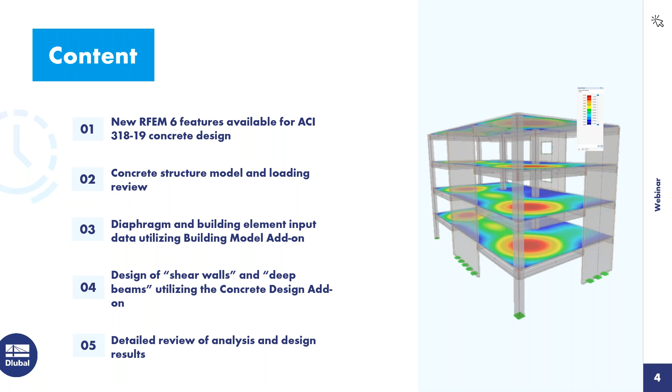For those not familiar with our program and the add-on concept, I want to quickly explain that for structural design related to concrete. RFEM 6 is the base program. This allows us to fully model the structure. We can integrate with BIM software. We have access to all the materials and cross sections in the library, and this is also valid for hybrid structures. We can load it and then get a full static analysis. If we want to take this a step further to design the columns, beams, or surfaces, we need the concrete design add-on that will carry out the design according to the ACI, CSA, or other international standards.

We then have the building model add-on. RFEM is a general FEA program, but this building model add-on releases building-specific features that give us the ability to define stories as well as shear walls and deep beams. There are many other add-ons relevant here, but for today I just want to mention a couple others used in our example for dynamic analysis. This includes the modal analysis add-on and the response spectrum analysis add-on to generate seismic forces. We won't be going into detail on these today, but we have previous recorded webinars for both ASCE 7 and NBC that go further in depth on this topic.

Turning now to the new ACI 318 features implemented since our last webinar: we now have the ability to carry out the punching shear design check for column-to-slab and wall-end-to-slab intersections. The current design check will only flag the user if two-way shear reinforcement is required. There is currently no input option for that two-way shear reinforcement, but we plan to add that in the near future. We've also added additional Chapter 18 seismic design checks. Currently this is reinforcement detailing checks only, but we'll continue to expand on this, such as strong column, weak beam.

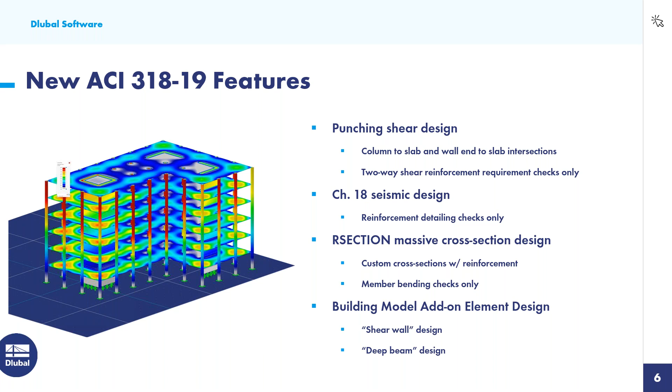Finally, we have the building model add-on that releases these building-specific features, and today we'll be focusing on shear wall design and deep beam design. On the next slide, let's talk a little bit more about the shear wall design we will see in today's example.

This does require the building model add-on integration in addition to the concrete design add-on. Essentially, we draw these shear walls with 2D surfaces within RFEM. When we define it as a shear wall, what's happening underneath the hood is that a result beam is going to be created, and a result beam simply sums up the internal forces across this 2D surface and presents it in a beam type manner.

We also can input the reinforcement under the shear wall dialog box. We have added this new cross ties input. Again, we'll see this in our example today.

As far as the design checks, we will refer to chapter 11 for the in-plane design checks, as well as out-of-plane, in particular section 11.5. We'll carry out additional chapter 11 detailing requirements such as spacing and minimum reinforcement. And as mentioned, we also have these chapter 18 seismic detailing requirements where we'll check the spacing and minimum reinforcement requirements here as well.

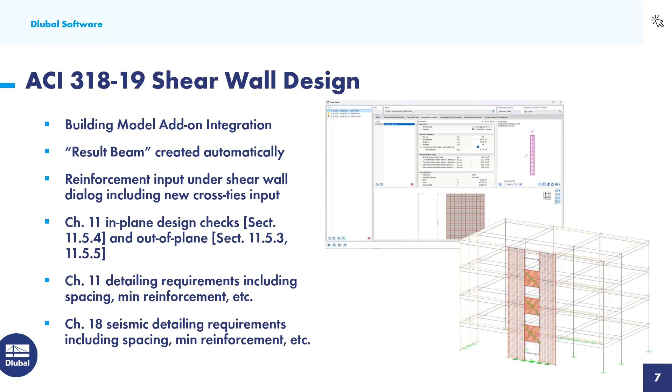Now, deep beam design follows a very similar workflow to the shear wall in the fact that we do need the building model add-on integration. Very similar, this is also defined as a 2D surface. We create this result beam underneath the hood, but instead of a vertical result beam like our shear wall, we have a horizontal result beam here to sum up all of the internal forces so that we can easily design this.

The reinforcement input options are also available under the deep beam dialog box, and we have added the new diagonal coupling reinforcement input. As far as the design checks, we will refer to chapter 9 for deep beam shear strength and detailing design checks, and we can also consider those chapter 18 seismic shear strength and detailing requirements for coupling beams.

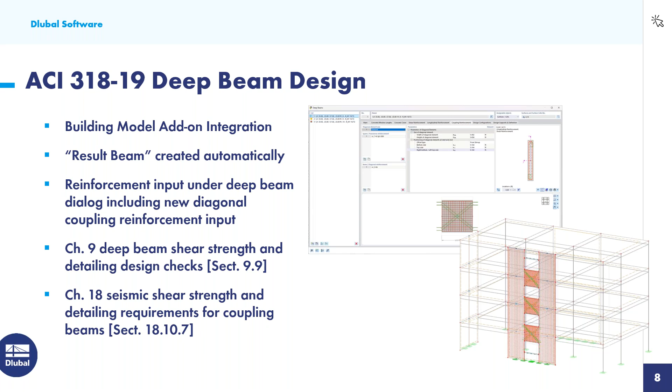So with that said, we will now turn to our example within RFEM. When we begin a new model, we are presented here with the base data dialog box. Under the second tab are all of the various add-ons that we have available, so essentially you're creating a custom software package that's specific for your design needs.

Now, for today's example, I do want to begin by enabling the concrete design add-on, and then we also talked a little bit about those dynamic analysis add-ons that we'll utilize in our example here.

Under the third tab for standards, we can generate the load combinations automatically according to ASCE 7. You'll notice here the latest 2022 standard is implemented. We'll also take advantage of our automatic wind load generators as well as snow load generators.

So we can set the standard here under the second option also to ASCE 7. The concrete design is set to ACI 318, the 2019 standard, but you can see here the alternative standards that we have offered, including the CSA. And finally, dynamic analysis for the response spectrum analysis will be carried out according to ASCE 7.

So now that we have this information set, you'll notice here that I have gone ahead and modeled our concrete structure for today. So let's do a quick overview. We'll begin with the materials. Everything is defined here with 5,000 PSI concrete that was just implemented, or pulled in from our material library.

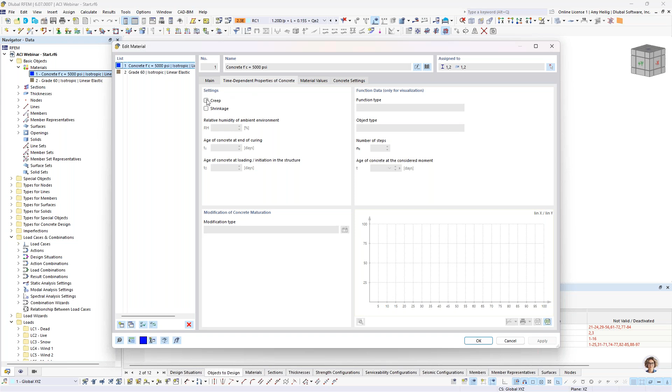Now, specific to concrete, we do have this second tab available to us under time-dependent properties of concrete, where we can further specify the creep and shrinkage behavior of this material. This will come into play a little bit later on for those time-dependent deflections. If we do specify creep and shrinkage, we will refer to ACI 435 for that consideration. For today, I'm not going to take advantage of anything related to the creep or shrinkage input.

So we will now move on to the cross sections. You'll notice here that the columns are defined as 20-inch by 20-inch square sections, and then we have various beams here that are supporting the slabs and spanning in between the columns.

Well, if I zoom in here and double click on one of these members, I want to point out that the member type is not set to beam. A beam is any standard column or beam element, but rather this is set to a rib. And when we specify this under this second tab, rib, we can actually define here the effective width on the left and right hand side of this beam element.

We further have the ability to integrate the internal forces and loads from the slab element itself from the static analysis, and then we can design it as a T-beam within the concrete design add-on.

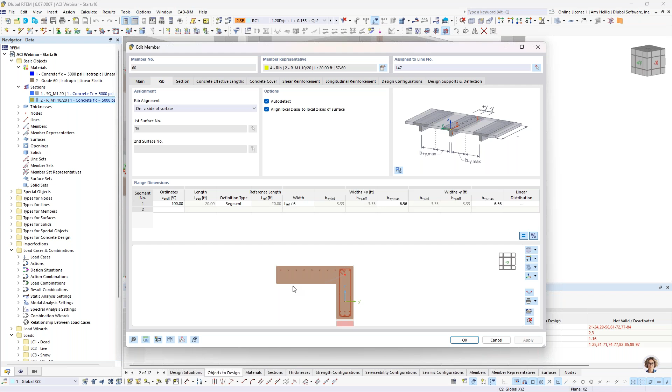For this rib element, we're at the edge of a slab, so we only have effective width defined on the left-hand side. This is unique to rib elements rather than a standard beam element.

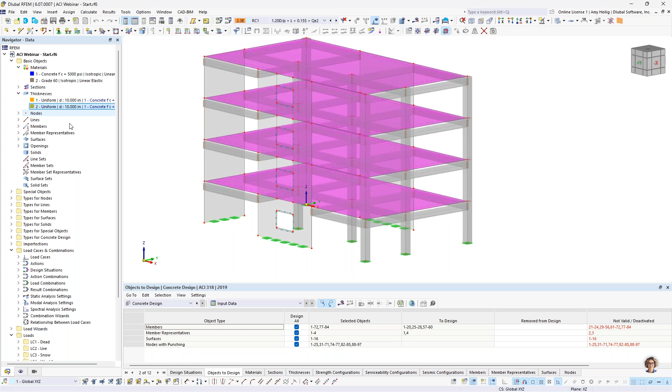We also have thicknesses defined here, assigned to the surfaces. For our shear walls, we have 10-inch thick concrete defined, and for our slab elements, these are also 10-inch, 5,000 PSI concrete. At the base of the structure, we have rigid nodal supports at the columns, and a fully rigid support at the base of our surfaces, defined as a line support.

We'll now move on to a loading overview. Going into the load cases and combinations dialog box, under load cases I have defined dead, live, snow, and wind. These are our static load cases, and once defined here, we would need to apply the loads graphically to the structure.

We'll take a look within our drop down at the dead load case. Self-weight is automatically considered internally for all elements, but I have added an additional surface load here of 50 pounds per square foot.

We are not confined to applying a surface load to the entire surface, as shown here in our toolbar. We also have options called free loads. For example, a new free rectangular load could be applied to just a certain portion of the surface rather than the entire surface as a whole.

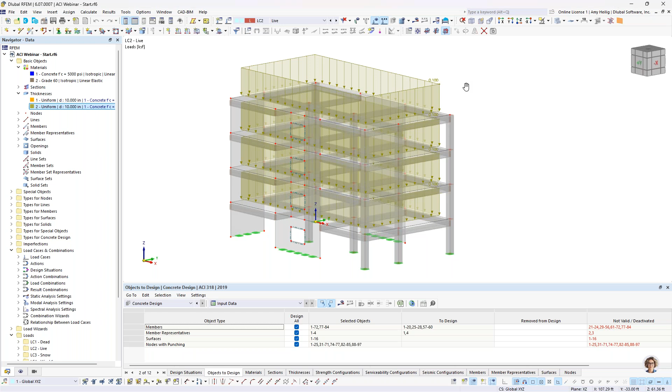We also have the live load case here, same concept. The magnitude for the surface load was increased to 100 pounds per square foot.

Then we have our snow load here at our roof level, and for this I took advantage of the load wizards found in our dialog box. Under the load wizards, we set this to ASCE 7 so the program can automatically generate the snow and wind loads. In this dialog box, we specify the geometry and input the parameters specific to ASCE 7, and the program calculates these snow loads for us.

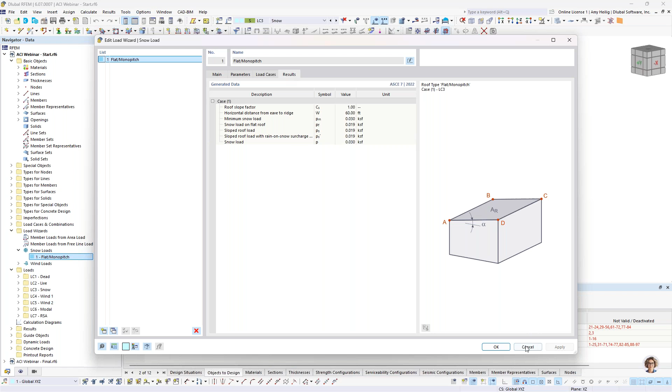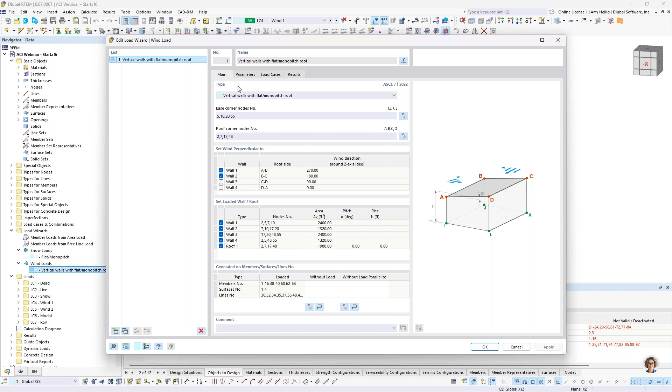Very similar, we have our wind load generator. If I toggle to my wind load case, we see this applied lateral load. Going into the wind load dialog box, again we input the geometry points and the type of roof, then input the parameters specific to ASCE 7, and the program can generate all of the wind load cases from case 1 to case 4 of ASCE 7.

For this simple example, I am just generating the minimum wind loads in both directions, so everything else is unchecked. For our first minimum wind load, we see this applied area load laterally in the global Y direction. I can right click to display separately, which shows the loads applied to the structure based on the tributary areas, or turn this off for a cleaner area load display. Similarly, we have wind load in the other direction with its applied area load.

Going back to our load cases and combinations, I also have a couple of dynamic load cases here. This is covered in previous webinars on our website and YouTube channel, but we have a modal analysis load case where we carry out the eigenvalue analysis to determine the natural frequencies, vibrations, and mode shapes of the structure. We can import a mass combination for this calculation.

We also have our response spectrum analysis load case. We refer to ASCE 7 to generate these seismic loads in the orthogonal X and Y directions. Ultimately, once we have all of these load cases set, we need to combine them into the load combinations.

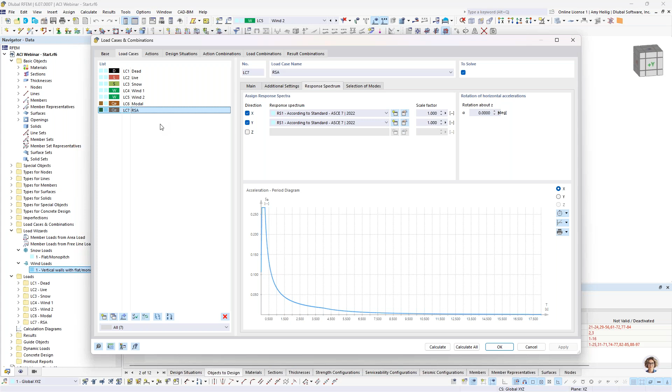Under the design situations here, you can see that the program automatically groups together these load combinations in what we call a design situation. So we have our first two design situations here in orange that include our factored load combinations from ASCE 7, cases 1 through 5.

This second factored design situation includes all of our seismic loads, 6 and 7, again directly from ASCE 7. We can click on this info button to see that information pulled directly from the standard.

Now we further have a couple design situations here for our unfactored loads. So we have the ASD load combinations 1 through 7, and then 8 through 10 that include those seismic forces. These design situations are ultimately needed within the concrete design add-on, and we'll see later exactly how we assign the limit states to these different design situations.

But for now, just think of these design situations as grouping together the load combinations. If we're interested, we can click on the load combinations tab and see the load combinations listed out individually - our factored load combinations in orange belonging to that first design situation, and our unfactored load combinations here belonging to the third design situation.

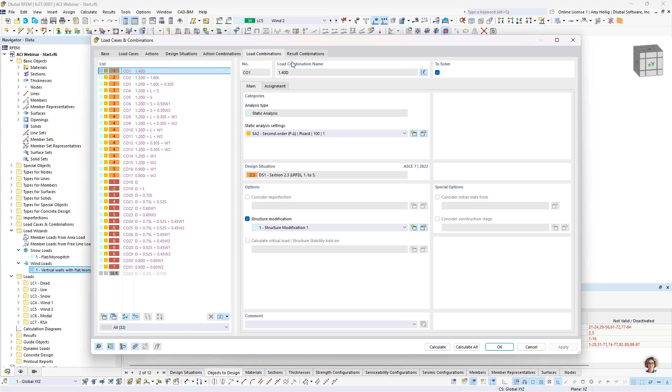This is different than a load combination that is automatically carried out according to a second order analysis considering P-delta effects. Again, this is covered in that response spectrum analysis webinar, but ultimately these result combinations also belong to those design situations.

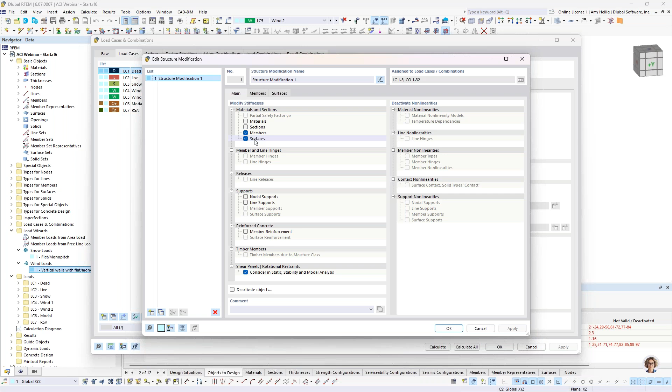One more thing I want to touch on is that for the load cases, I have a structure modification set here, and this is really important for concrete design. If we go in and take a look at this definition, I have enabled both members and surfaces because these are the two elements we have in our model today, and then I get two additional tabs up at the top.

Within my first definition type for members, we have the ability to directly select ACI 318, which refers to table 6.6.3.1.1A to apply those I-crack factors to our member elements within the model. We would want to select whether this is a column or a beam, and we can see the relevant stiffness modification factors given here.

So once we have this definition, we can graphically select all of the column elements within the model that this stiffness reduction should be applied to, and the same exact concept for our beam elements.

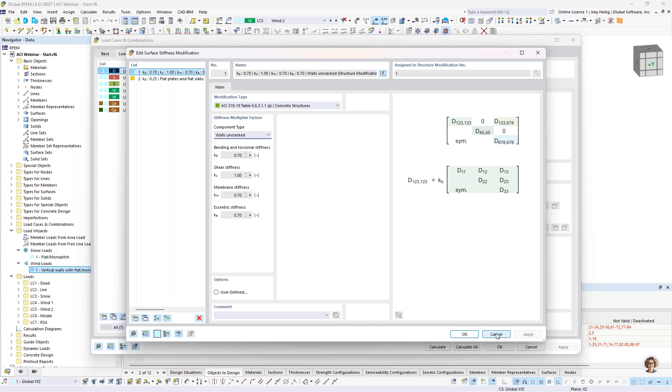In a very similar manner, we also have the surfaces tab here - I created my first definition by simply selecting ACI from this dropdown, then choosing whether it's walls uncracked, walls cracked, flat plates, or flat slabs. This refers directly to the ACI for those I-crack factors, and then we can graphically select the surfaces that this stiffness reduction should apply to.

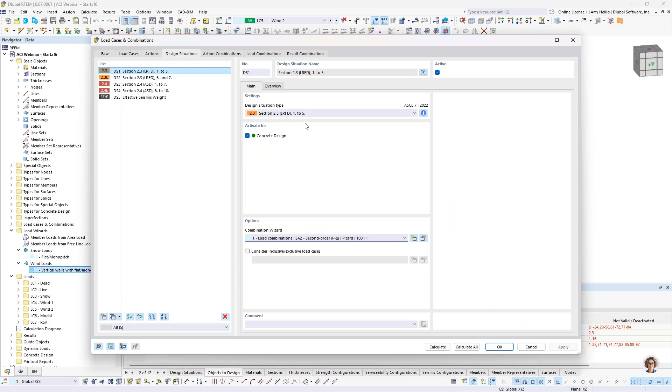So we could go ahead and apply this to all of our load cases. It's also possible under our design situations, especially these factored design situations, to go into the combination wizard options and activate this structure modification as well. By doing it within the design situation, you'll see the load combinations automatically include those I-crack factor stiffness reductions as well.

So now that we have covered the loading and the structure, it's now time to input the reinforcement that's specific to the concrete design add-on we have already enabled within the base data dialog box. Before we begin, you'll notice we do have the concrete design option available within our dropdown table.

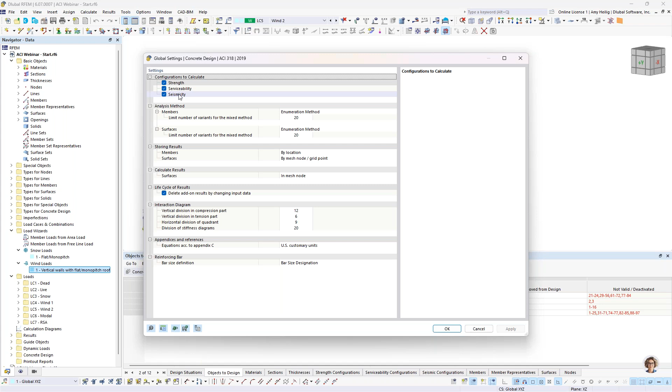When we select this, there is an option called global settings. By default, the strength and serviceability design checks will always be carried out. But if we want to further carry out those seismic detailing checks, we would want to turn this on, because by default this is typically not enabled. So we'll go ahead and do that for today.

Okay, so we want to talk about the reinforcement input for a column. And if I double click on this column here, you'll notice that the design property checkbox is turned on. So this is telling the program that not only are we interested in carrying out the static analysis within the base program, but I also want to utilize that concrete design add-on to input in the reinforcement. Now, when I turn this off, you'll notice all of these tabs here disappear, and this is simply telling the program that we're only interested in the analysis.

So we certainly could carry out the reinforcement input here within this single column, but I do want to talk about the benefit of what we call member representatives. Currently I have this turned off graphically within the model, so I'll go ahead and turn that on. You'll notice that we have a lot of color-coded dots here for each one of these members. Well, this is because the program has grouped together identical members in what we call member representatives. So members that have identical cross sections, materials, lengths, and possibly even for concrete, the same reinforcement input will all be grouped together here.

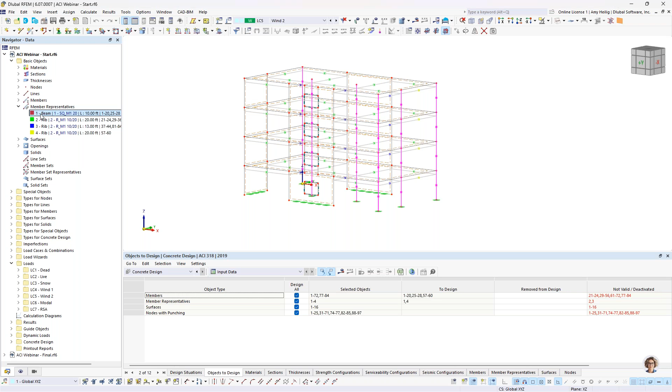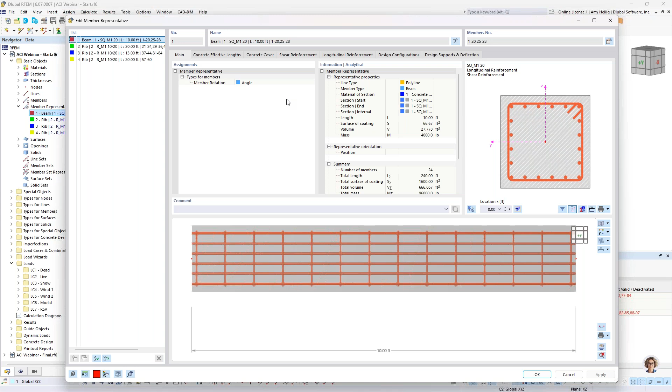Now, the benefit is that if I take a look at the member representative number 1 here, you'll notice that this has grouped together all of my columns. So we see this highlighted in the background. I have these exact same tabs here to input in the reinforcement as I do the individual columns. The benefit is that if I define the reinforcement here within the member representative, it's applied to all columns at once. If I need to make a change, I do it within the member representative. Again, it's going to affect all the columns defined here. So we will go ahead and input in these various tabs, and I'll go through these in detail.

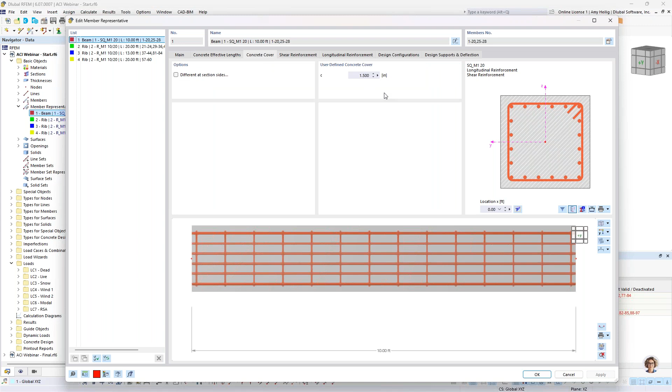The concrete effective length. So if we are carrying out a first order analysis and utilizing the moment magnification method, we would want to input in an effective length. However, if we are designing to second order analysis and considering P-delta effects, which we are within our load combinations today, we don't really need to do anything within this particular tab. So we'll go ahead and design according to second order analysis. Now the concrete cover should be input. This is left here at 1.5 inches, which is the default.

Now I went ahead and input in the shear and longitudinal reinforcement for these members, so we'll just give a quick overview. So the shear reinforcement is set at number 4s at 9-inch spacing on center. So we can see that spaced out evenly along the member here. Now it's entirely possible to create different zones for both our shear and our longitudinal reinforcement with this option in the lower left-hand corner. And then we can modify here the span location. So for example, if we wanted closer spaced shear ties at the ends of the member versus the center, we could create a couple different zones here.

The longitudinal reinforcement, you'll notice here that I have selected the option from our drop-down as uniformly surrounding for the longitudinal bars. And I have defined 20 number 6 bars, so the program will place these around the cross-section as shown. Now, we do have additional options here to define a development length if we would like. You can see that within the drop-down box here, where we can see the development length shown graphically. We can modify that development length itself in terms of feet. For today's example, I'll leave all of the development lengths off, but that is where you would want to input that information.

Now, the design configurations, I'm only going to go through this tab once because it's the exact same application for all elements that we are designing. We have here these strength configurations to begin. So if I go into the default setting here, you'll notice that we have 4 different tabs depending on which element we're designing, whether it's a member or surface or even punching shear. These are all of the various options specific to the strength design checks according to ACI. So whether we're turning options on or off or modifying them, this is all specific to the strength design. Now we did put in here the code references, so we're trying to clarify exactly which settings you are modifying. You can refer directly to the ACI standard.

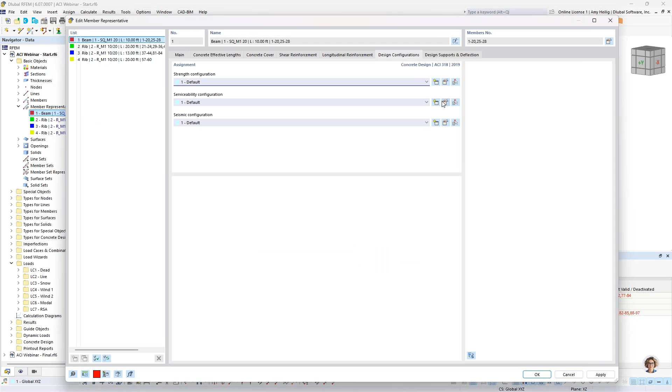Again, this is going to be specific to the serviceability design check. So for example, we can calculate the crack width. For surfaces, we have minimum reinforcement due to shrinkage and temperature. We also can check deflections. So whether that is simply supported or cantilever beams or columns, this also can be carried out for surfaces.

And then if you remember, we talked a little bit about the time-dependent deflection. So I had mentioned that under the material properties, when we input creep and shrinkage for that material in more detail, we probably want to toggle this to refer to the ACI 435. So this is certainly a far more complex approach here within the serviceability design checks for that long-term deflection.

Now, alternatively, when we leave this as default with the factor according to the ACI table 24.2.4.1.3, we're simply going to apply some type of factor to the immediate deflection based on the duration of the load. So much more simplified approach.

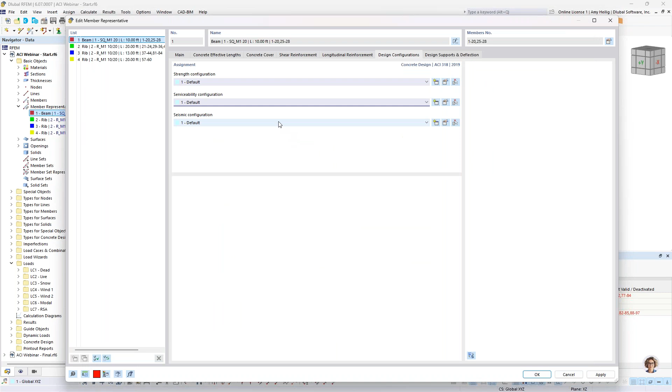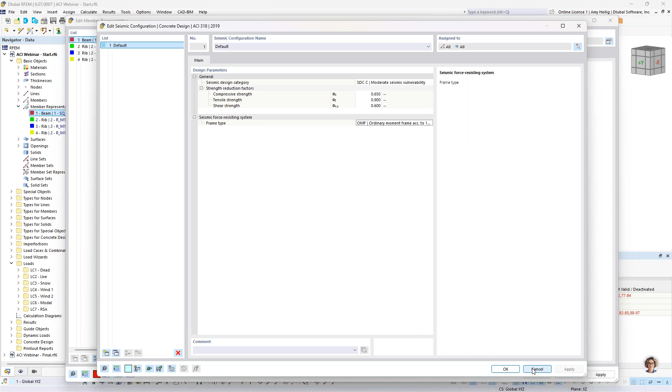Okay, and finally we have the seismic configuration. So we'll go in here and you'll notice that for the seismic detailing checks, we can select for our members the seismic design category from this dropdown. We also have the frame type here that is set to ordinary, intermediate, or special moment frame. And again, this is applicable to members and to surfaces for those additional detailing design checks.

And finally, we have the design supports and deflection. So if I input nothing within this tab, the program is simply going to assume that this member is supported at both ends, and it will refer to the limiting deflection ratio for simply supported members. In contrast, if we have a cantilever, we probably want to assign a design support at the left or right end so that the relevant deflection limit is referred to.

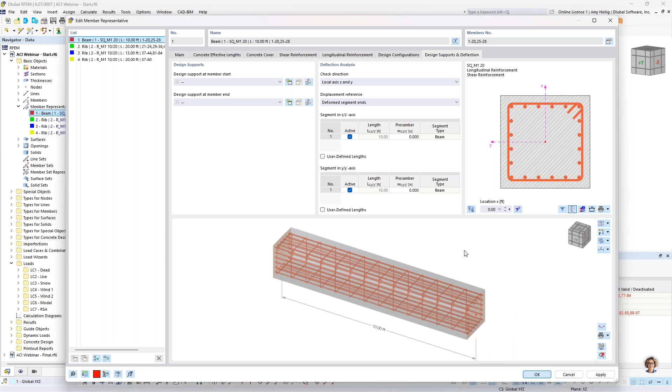Now, I am just going to leave this as simply supported for our column elements, but we'll see in just a minute how we can set this differently for our rib members. So once this information is done, we want to move on to the reinforcement input for our 4 rib members over here on the right-hand side. So very similar to the columns, these are all grouped together in a member representative as well.

So if we take a look just to quickly review this information, again, because it's a rib member, we are going to include the effective width here of the slab for the member design. And we run through these various tabs. Concrete cover is set to 1.5. The shear reinforcement is number 4, set at 6 inches. Again, we could set different zones if we would like.

The longitudinal reinforcement. So this is going to be a little bit more detailed than what we saw with the columns. You'll notice that I have 3 number 6s set to symmetrical. So this is going to place, again, 3 number 6s at the top and at the bottom that are currently highlighted. Well, we also have an additional 3 number 6 bars defined here at the bottom with what we call the rebar type line. So this line option allows me to place a line of reinforcement, and I can specify the different offset either left or right or top or bottom with this input option.

And finally, we have 8 number 6s that are defined in that surface effective width itself. So this was also defined with the line option. I modified the offset here, such as 8 inches, so that we can input this longitudinal reinforcement within the slab element. So pretty simplified for today because we'd probably want to create different zones with different longitudinal reinforcement, but this is just a little bit of an overview for this simple example.

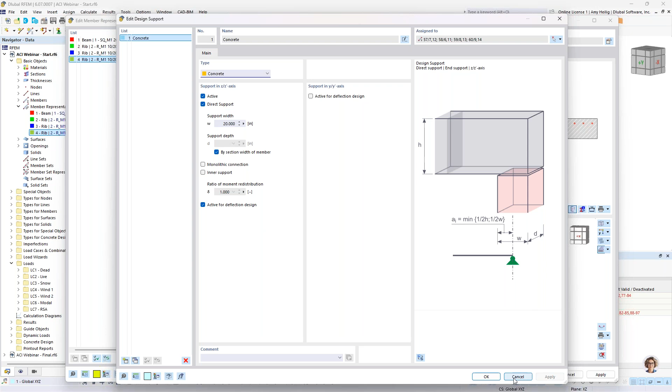So once we create that support, we can select that same definition type here at the member end, and then we actually see the support shown graphically here in this dialog box. So this is how we can consider that reduction of the shear force.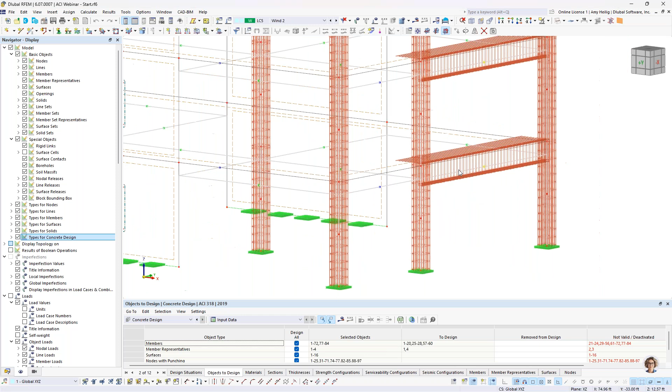Okay, so now that this information is input for our beams and columns, what would typically be shown if I go to my second tab here under the navigator and I turn this into wireframe view, is we can actually view the reinforcement that we have input graphically in the global 3D model. So again, this is only specific to the elements here that I have defined so far. If you feel like that's a little overwhelming, you can always turn that off, of course.

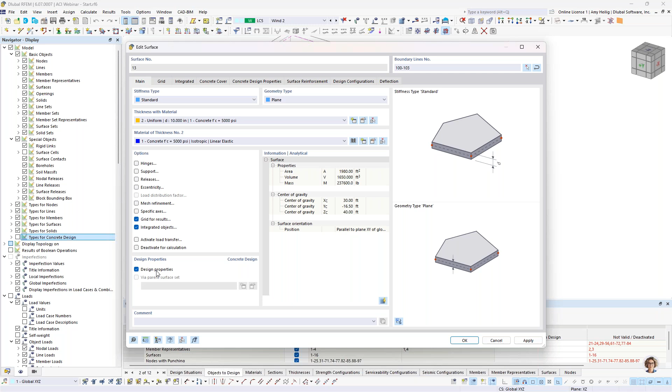Now, to talk about the surface reinforcement, I'm not going to go through this. This was covered in a previous webinar, but it's the exact same concept where we can activate the design properties, we can input the surface reinforcement, and similarly for punching shear checks, what we would want to do is to choose one of these nodes where it's framing into that reinforced slab.

We double click on it, and very similarly, we have a checkbox here for punching design and an additional tab here that refers to the strength configurations for those punching design checks. So again, we won't be doing either one of those for today's example, but I just did want to mention that. So now it is time to move on to the building model add-on.

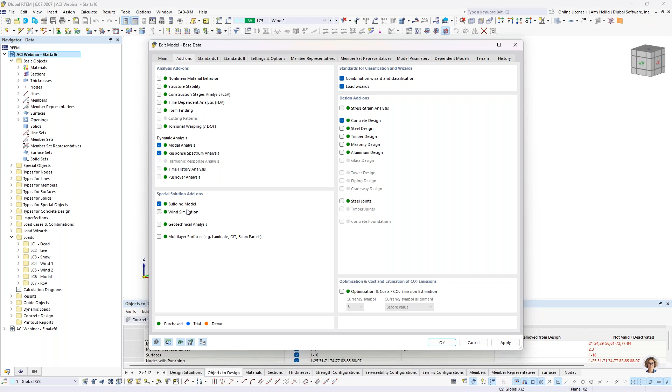So for this, I want to right-click here to activate the base data dialog box, and under the add-ons, we will go ahead and turn on the building model add-on. And I click OK. So at first glance, nothing changes graphically here. The only thing that we now have access to in our navigator over on the left is a new folder called the building model. So we can now define our building stories in this general FEA program.

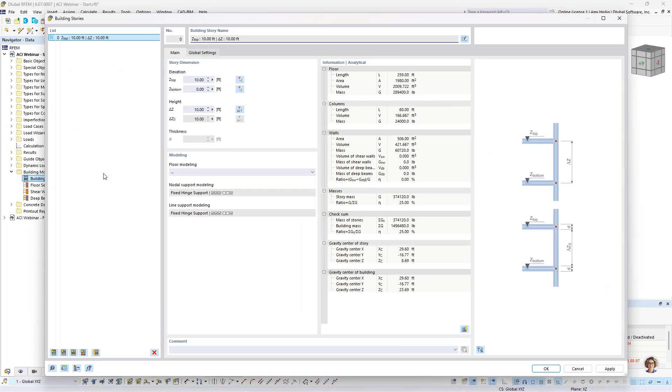So I'll go ahead and double click on this dialog box. And the program will automatically assume that we want to create our first story, and it detects the height of that first level. Well, we will continue to create the additional stories above it with the option here in the lower left-hand corner for a total of 4 different floors.

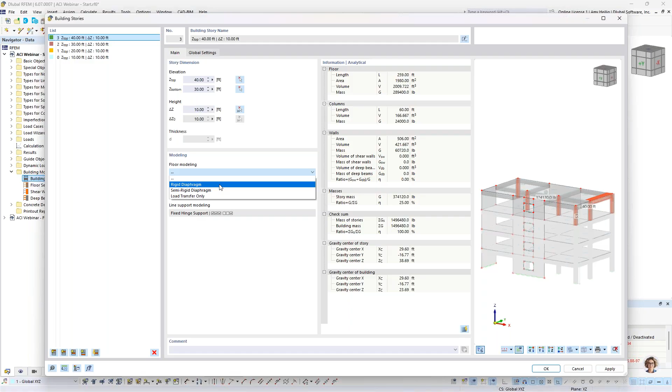Now, once we have created the different stories, you'll see here that for each one of our floors, we now have the ability to assign a diaphragm to this particular floor or to all of the floors, including rigid, semi-rigid, and load transfer only. So let us go back to the PowerPoint because I do want to discuss the building model add-on concept in more detail, as well as these different diaphragm options.

So as mentioned, RFEM 6 is a general FEA program. We are not restricted to only building analysis and design. Rather, we can model tanks, silos, fabric tensile structures, maybe an FEA of a steel connection. Really anything is possible. But this building model add-on is releasing these building-specific features in this general FEA program, such as the ability to define stories. Now, we also have the option, which we'll see in just a minute, to define shear walls and deep beams.

The added benefit of the building model add-on is that once we run the static analysis and even the dynamic analysis, we will get additional results available in table format for results by stories. So for example, if we're looking at a response spectrum analysis, we can actually view the story shear or the base shear in table format. For static or dynamic analysis, we can also view the shear wall forces in table format. We can export that out to Microsoft Excel quickly.

If we have a rigid diaphragm, we'll be able to view in the table the center of rigidity as well as graphically where that center of rigidity occurs. So many more options, again, specific to buildings will be released. Now, as mentioned, we have now these various diaphragm types available. So we recently released semi-rigid diaphragms. So now we have all 3 options available to you, including rigid, semi-rigid, and what we call load transfer only, otherwise known as a flexible diaphragm.

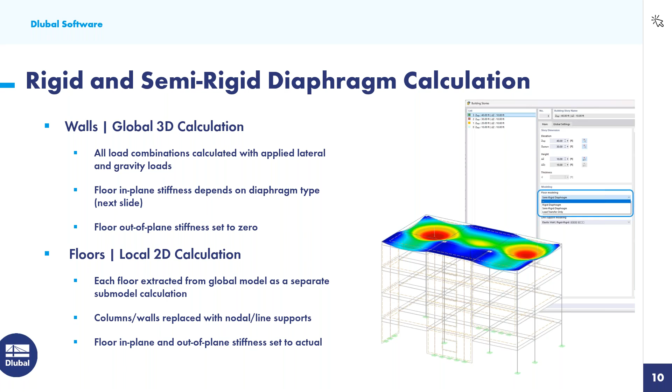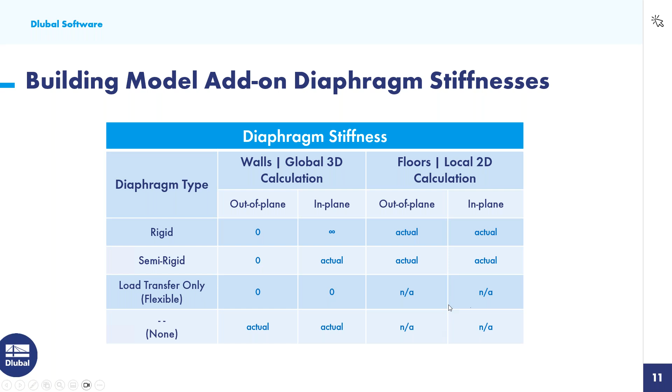Now, we also have the couple columns here at the end for the local 2D calculation. So in case we have defined a rigid or semi-rigid diaphragm, you can see here that the actual stiffness will always be used for both out-of-plane and in-plane. Now for the load transfer or no diaphragm, remember we're not running a separate 2D calculation, so this is not applicable within this table.

So we'll go back to our example today, and for all 4 of my floors, I'm going to define here a semi-rigid diaphragm. Now remember, for rigid or semi-rigid diaphragms, when we carry out that separate 2D calculation, we're replacing the walls and the columns underneath it with line and nodal supports.

Rather than having those line and nodal supports set to fully fixed or fully released, the program can actually calculate the true stiffness of those elements framing up underneath it, and we can create an elastic support condition here with a spring stiffness set. So that's what I'm going to use today. I want the program to refer to the true stiffness of those elements framing up underneath it.

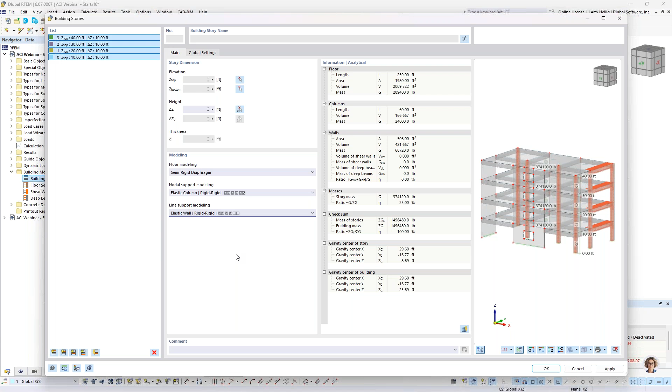Once we have set this information, you'll notice that if I double click on one of my floor elements, the stiffness type is now set to floor slab semi-rigid diaphragm. I can't modify this because it's defined directly within the building model add-on.

Now, in addition to the building stories that have been defined, we have the ability to create our first shear wall definitions. Before we do, I'm going to activate what we call the surface cells, which I had turned off graphically, and I'll turn those back on. Surface cells are automatically turned on when we enable the building model add-on.

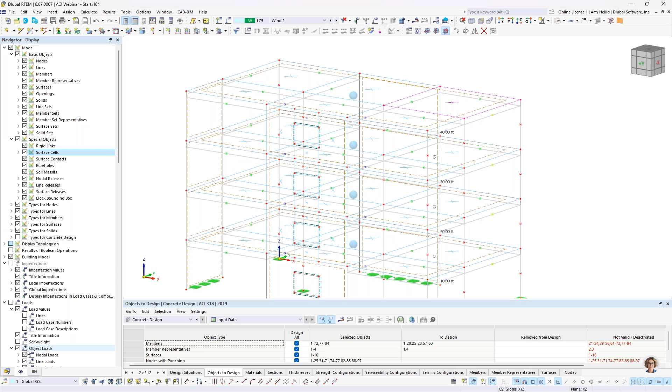You can see here that it creates these surface cells at various portions of the structure on the surface elements themselves. I'll turn this into an elevation view and highlight only my front shear wall. Here we have our 4 shear walls displayed graphically, and you'll notice that those surface cells for the shear walls at the 2nd, 3rd, and 4th level are shown. This is really helpful because it will help us define what is a shear wall on the left and right hand side versus what's a deep beam spanning between these openings.

Now, for this first shear wall, you'll notice that I don't have those surface cells. So anytime you have a shear wall with an opening, what we need to do to generate these surface cells is actually create a line element that spans from the opening to the edge of the surface. We certainly can do this manually with the new line option in our toolbar and graphically drawing that line, but I'd like to show you a quick trick.

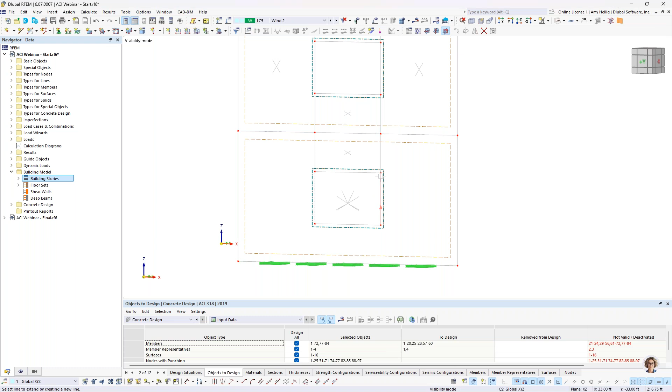With our drawing tools down at the bottom, we have this option to extend the line graphically, something you might find similar in AutoCAD. When I choose this option and hold down the Alt key on my keyboard, the program will automatically extend this line when I click on it, on the upper left and right hand sides, without affecting the opening. I'm going to do so here at the bottom right and at the bottom left. Now you can see those line elements are automatically created again without affecting that opening, and the surface cells were automatically detected when we do this. So in case you have a shear wall with openings, you certainly want to take this workflow.

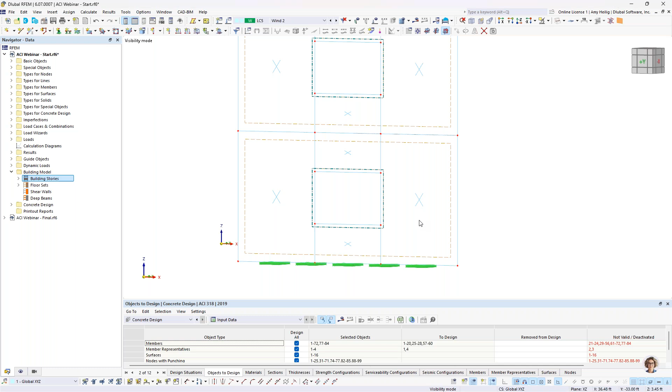So now we can define our first shear wall by right-clicking within our building model folder, and we create our first shear wall definition. We want to select the surfaces, or the surface cells. So I will graphically select all of my surface cells on the left-hand side of this opening to define one continuous shear wall on the left-hand side.

Once this is done, I'm going to create a new definition type, doing the same thing on the right-hand side of the openings. And we have one more shear wall definition. For this one, I'm going to cancel out the visibility and go back to a rendered view because I want to create my third shear wall over here on the left-hand side. Notice this one doesn't have any openings, so we can just directly select the surface itself without having to worry about the surface cells.

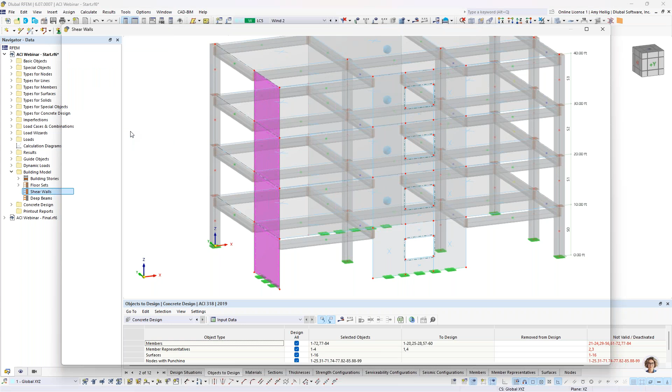Once we have input the shear wall definitions, we can hold down our shift key to select all of them, because I'm going to input the same options here for all 3 shear walls at once. Now, the first option here is to generate the results section.

Remember, I talked about how that result beam is created underneath the hood. Then we can present the internal forces that are summed up over these surfaces in table format. So that's what we're enabling here for the static and dynamic analysis, just to present that in table format. Now, very similar to our columns and rib elements, we want to turn on the design properties because we'd like to design these in the concrete design add-on.

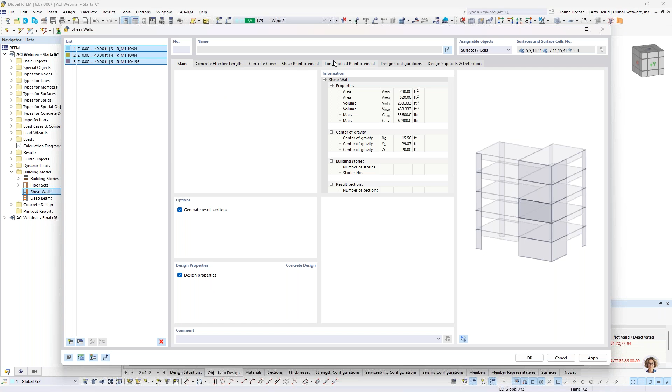And then we have the additional tabs up here at the top. So the concrete cover is going to be set at 1 inch for our shear walls.

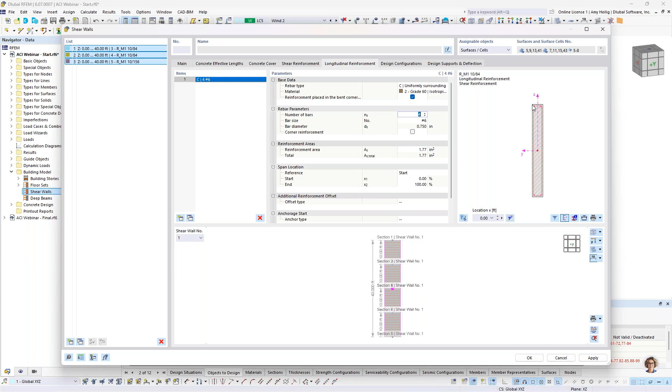I'm going to jump to the longitudinal reinforcement first, and select the option uniformly surrounding. With this option, I want to place the reinforcement at the bent corners of my stirrup, and then set the number of bars to 22 number 7s, selecting number 7 bars from the drop-down box. So then the program just places these longitudinal bars all the way around the shear wall.

We're looking at it in a plan view here. Now, the only modification I want to make is to shear wall number 3. This has a much longer width than the first couple shear walls, so we'll increase the longitudinal reinforcement to 40 number 7s, and we see that adjust graphically.

So now going back to the input for all 3 shear walls, we'll go back to the shear reinforcement. I am going to select number 5s from my dropdown, and adjust the spacing to every 5 inches, so 0.417 feet.

This is a new option we have added within the shear walls: the ability to generate what we call the cross ties when I activate this checkbox. So now we see those cross ties enabled across all of the longitudinal bars here.

Now, if you do not want to consider a cross tie at any one of these locations, you can just click on the longitudinal bar here in the preview, and that cross tie will be deleted. If you want to add it back in, you just click on the longitudinal bar again, and you'll see that cross tie considered.

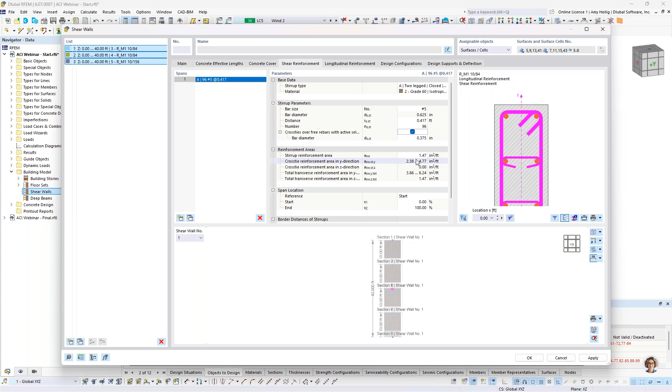Now, lastly, we have the design support. Very similar to what we saw with our member elements, we can also add design supports where it's framing into the slabs or floors along the height of our shear wall.

For the start and end of the shear wall, I'm going to create a new design support of the type concrete. The support width is set to 10 inches because that's how thick my slab is that's framing in the transverse direction. For this one, it will not be an inner support.

I click OK, and then I can select this new definition within my dropdown, and we can zoom in here and see that design support shown graphically at the start and end of the shear wall.

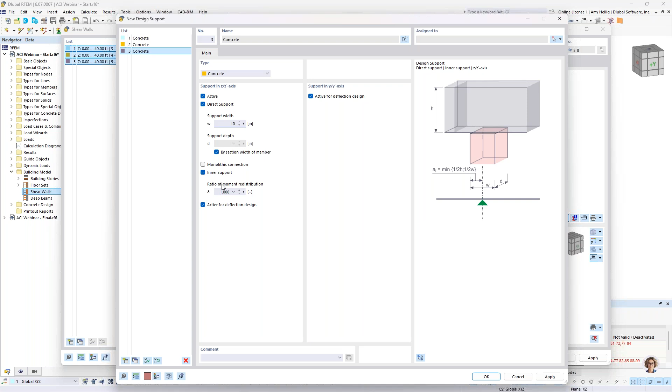Now for my interior support, we can create a new definition type. Again, very similar, 10 inches in width, but this time it will be an inner support. We can select this from our drop-down box for all of the interior support options.

Now you can also hit F7 on your keyboard to copy the cell from above into the current cell. We now see those support conditions modeled along the height of the shear wall, representing those slabs framing in at those transverse locations.

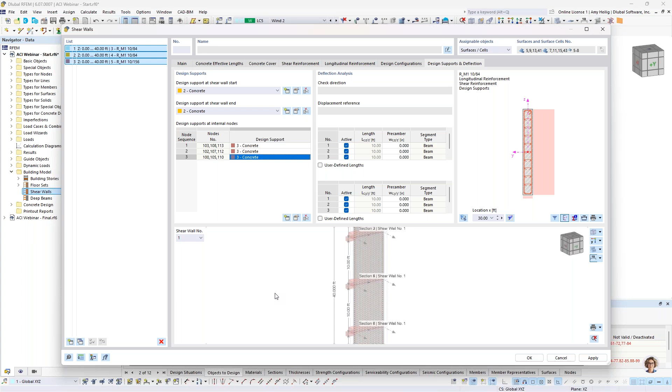All right, so now that we are done with our shear wall input, let us talk about deep beams. This is really going to be a very similar workflow. We're going to begin by right-clicking to create a new deep beam.

The program will ask us which surfaces or surface cells we want to consider. I'm going to zoom in here and choose the 2 surface cells that are spanning between the openings of my first and second floor.

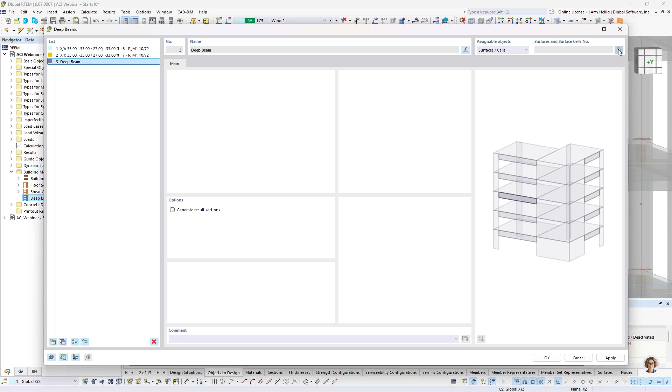I'm going to create my second deep beam that will span between the openings of the second and third floor. And finally, we are going to create our third deep beam that spans between those upper floor openings.

I'm going to highlight all three of these to generate the results sections and also to turn on the design properties with the coupling reinforcement that is specific to deep beam input.

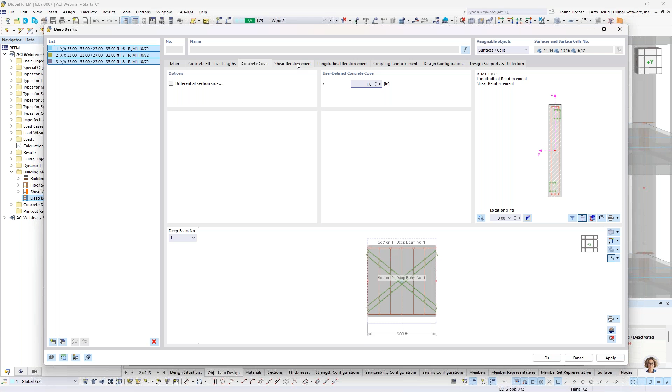The concrete cover, I'll modify this to 1 inch. And then we have the shear reinforcement, so I'm going to specify number 5, similar to our shear walls, at 0.417 foot spacing.

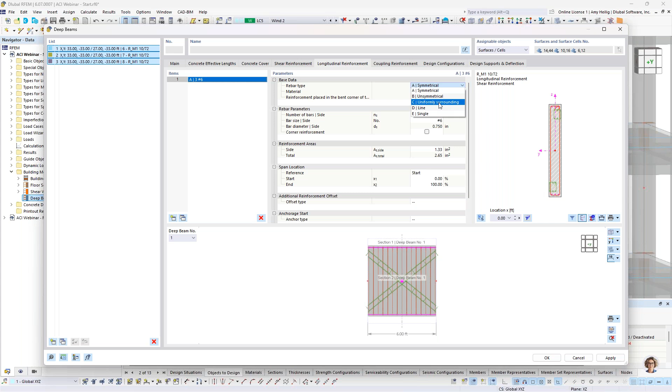We further have our longitudinal reinforcement. For this one, I am going to select from my dropdown, uniformly surrounding, and we're going to place those rebar at the bent corners of the stirrup with this checkbox.

I'm going to select 30 number 6 bars, and the program will go ahead and place those evenly around the perimeter of this deep beam.

And finally, we have the coupling reinforcement. Again, this is new, specific to the deep beam design. The first input is the transverse reinforcement, and as I click on it, it's highlighted here to bundle these diagonal bars together. The default is number 3 at 1 foot on spacing, and we'll leave this as default.

Then we also have the diagonal reinforcement itself that we can view here, or zoom into the cross-section view. This is going to be 3 number 6 bars set at both the top and the bottom. Additionally, we can set an anchorage or development length on either side of this reinforcement.

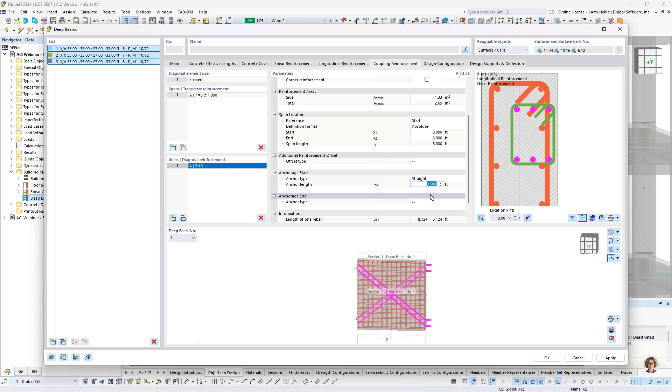If we wanted to do that, we would select the anchorage type straight, and we could modify the length to maybe 1 foot. You'll notice the preview update here at the bottom. We'll set this development length to straight on the left side as well, with an input of 1 foot. So that will be all of the input here for this diagonal reinforcement.

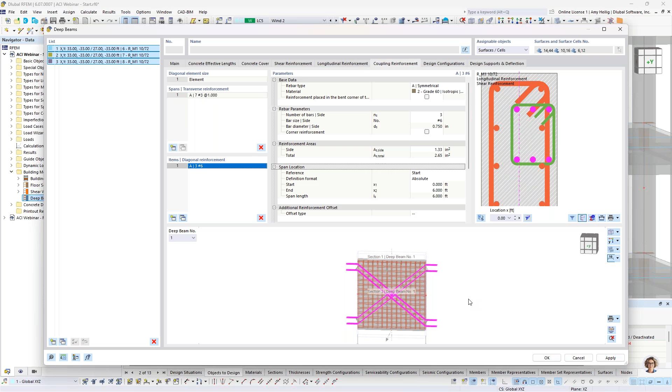The final thing to do would be the design supports, but in this case we really just want to consider it supported at both ends, nothing further to do here. We'll click OK because we are now done with the reinforcement input for both our deep beams and our shear walls.

Now, if we drop down to the concrete design add-on within table format, we have here the input data, and as mentioned, here are those design situations. So what I'd like to do is take that first design situation, those factored load combinations grouped together, and set the limit state to the strength design LRFD.

But then we also have the factored load combinations that include those seismic forces in the second design situation, so we want to choose the seismic design limit state from our dropdown. This carries out not only the strength design for these load combinations, but also those additional seismic detailing checks we talked about from chapter 18.

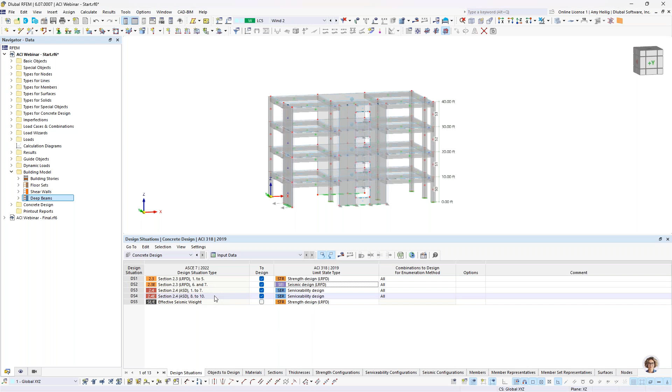We have here 2 design situations for our unfactored load combinations. These are both going to be set to serviceability design.

Now, under the objects to design, you can see by default the program just selects all objects within the model, but if we don't have reinforcement input for all of these objects, it wouldn't be possible to design them. So we'll leave the design of the shear wall and deep beams active, but for my members, I'm actually graphically going to select only these frames on the right-hand side that I have input reinforcement for directly. Once we're done graphically selecting these, we click OK, and we're now ready to run our calculation.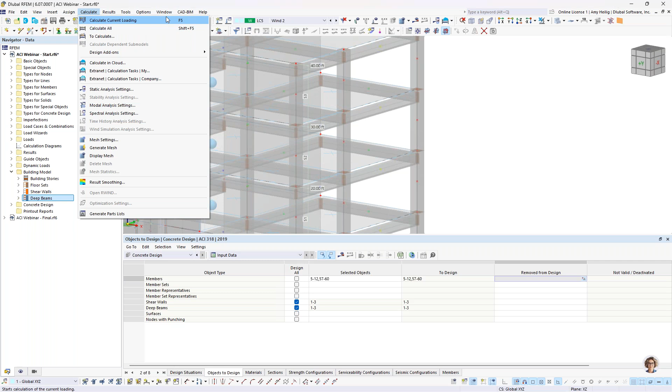So we would normally go to calculate, calculate all. It does take a few minutes to run, so in this case I am going to jump to an already saved model where this calculation has already taken place. So what we would see once we are done within the concrete design add-on is our results available to us in this dropdown where we can view the design ratios on members, shear walls, or deep beams.

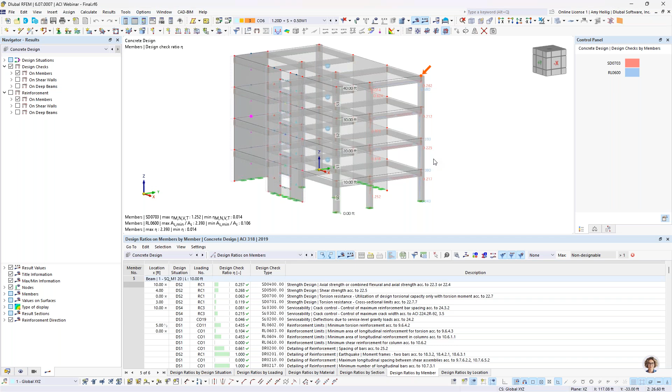So if we jump to the design ratios by member, you'll notice here that currently, as I'm clicking within this table, we are looking at this top column here. We can zoom in and you'll see all of the strength, serviceability, reinforcement limits, and detailing checks that are carried out for every single member here.

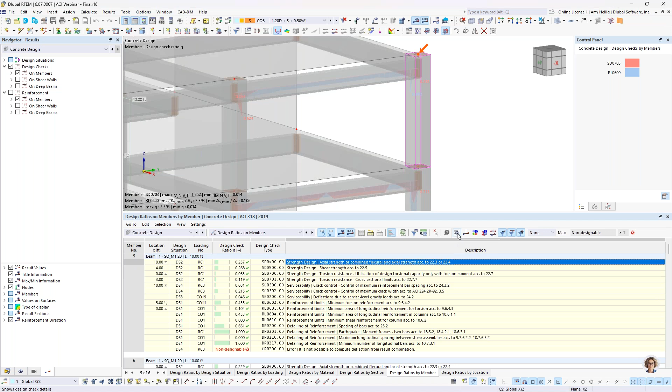So we can continue to scroll down through this table and see those relevant checks. For these specific design checks, we can always activate what we call the design check details, and this is going to show us in detail all of the calculations, the formulas, the variables, and ultimately how this design ratio was calculated.

We also see here the design equations and references from the ACI standard, so we can refer to that directly within the code. Again, trying to be transparent in where this information comes from so that you can understand how this design ratio is calculated. Now for our columns, we can also activate here the interaction diagram.

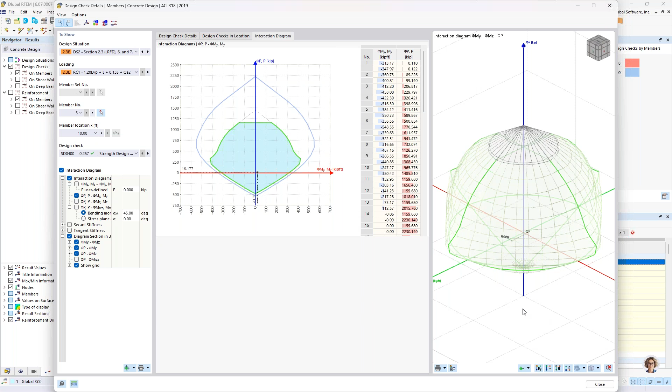So now we get an additional tab up here at the top where we can view this 3D interaction diagram either graphically or in table format. We see exactly where we land within this interaction diagram. So this is certainly something that is user-friendly in terms of adding to our printout report or just understanding that column interaction diagram, the results presented here.

The same concept applies for our rib members. Notice as I graphically select one of these rib members, the table will jump to that relevant member here. All of the design checks are shown within table format. The design check details are available if we'd like to take a look at the references, code equations, and things like that.

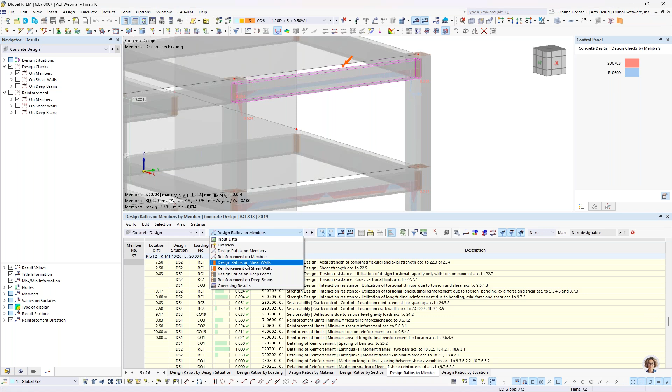Now jumping to the design ratios of shear walls. If we zoom out here, you'll notice that we're currently looking at our first shear wall, and again all of those same design checks. However, we're carrying out additional checks according to Chapter 11. We'll also see some of those seismic detailing checks included. Again, similar to the member design, we can activate the design check details to see exactly how this design ratio was calculated with the reference formulas.

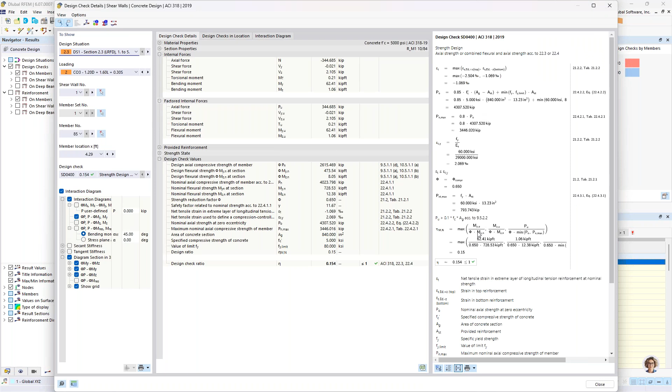Same thing for the design of the deep beams that we have designed. Everything is shown in table format, but it's also possible to show this graphically as well. For example, if I jump to a wireframe view and we're looking at this deep beam spanning between the two openings, we can turn on the design check ratios for our deep beams - maybe not the overall ratio envelope, but rather for each strength limit design check, I can turn that on graphically. You'll notice that we can overlay these different design checks of this deep beam graphically, depending on which design check we are displaying.

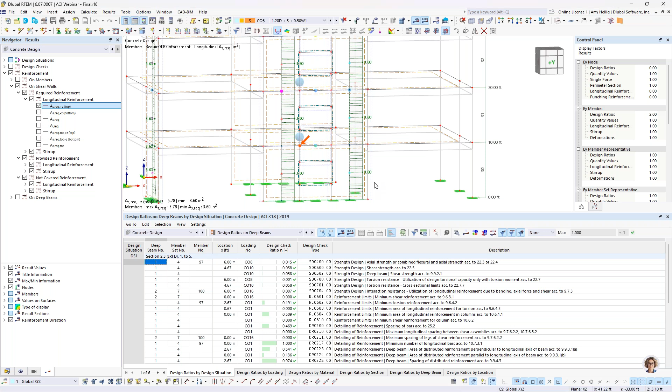In addition to the design checks, you'll see the ability to display the reinforcement. So we'll turn on the reinforcement display for shear walls and zoom out here. For my shear wall, I can display graphically the required longitudinal reinforcement - this is the reinforcement that's required from the static analysis. I can overlay this on the provided longitudinal reinforcement, so ultimately we hope that the provided reinforcement is greater than the required. If not, we can further display what we call the not covered reinforcement. So again, in addition to all of the table output, there are a lot of graphical options under the concrete design add-on.

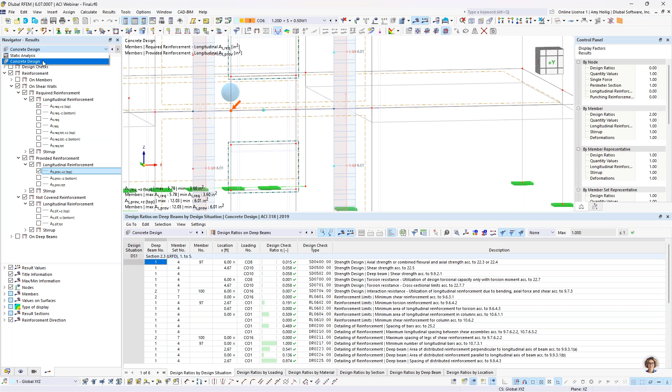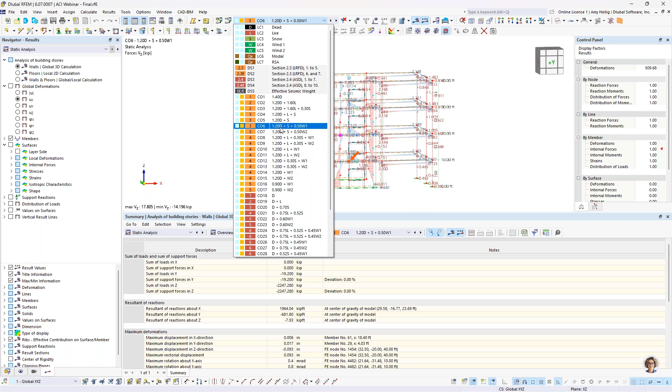Now, the very last thing I want to do is back up to the static analysis. We were just looking at design results within the concrete design add-on, but we can easily toggle to the static analysis and choose one of our load combinations. For example, I'll choose load combination number 6, dead plus snow plus wind. We'll turn on the display of our structure. Because I have defined that semi-rigid diaphragm, or if we had defined a rigid diaphragm, we have additional settings under the static analysis results, including that 3D calculation.

We're calculating in a 3D environment, all elements are considered, running through all of these load combinations, both gravity and lateral loads. We're just going to modify the diaphragm stiffness for this global calculation. In turn, we can toggle to that local 2D calculation. You'll notice that we're only going to see results for the floor elements themselves, because we're extracting each one of these floors in a separate submodel. We're placing line and nodal supports, and then applying the actual stiffness of the surface element itself, and we run through again all of these load combinations.

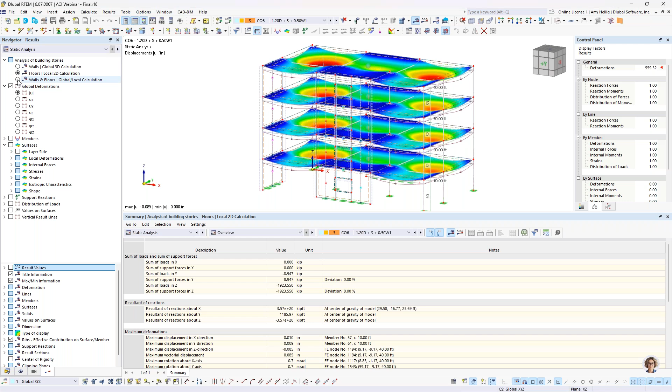Now, what's nice is that I don't have to sit here and try to interpret the results between the 3D versus the 2D, but we have this third option available. This is going to combine both the 3D and the 2D results by adding them together and presenting it graphically as one result. Very powerful - we're not just looking at gravity versus lateral, this is everything combined together. Not only graphically can we view these results, such as member internal forces and surface internal forces, but also in table format, and we'll see those results change depending on which option we have selected.

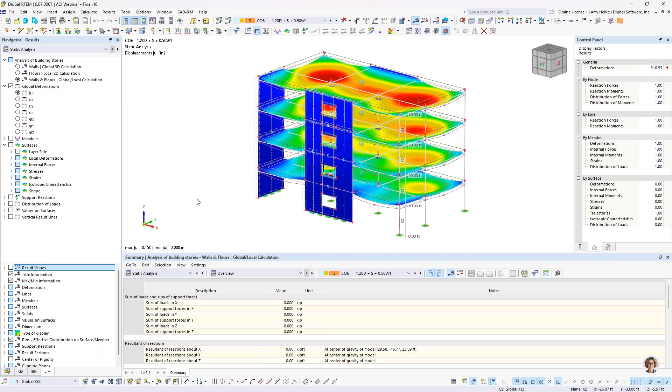In a similar manner, the shear wall boundary element reinforcement input. Again, we're running this design check for shear walls, but we're only going to flag you if that boundary element reinforcement is required. So we want to also add in an easy input option under the shear wall to input in that reinforcement.

As mentioned, for those RSECTION, those custom cross sections, we want to continue to allow additional design checks beyond bending. Additional seismic design checks. Currently, we're just doing seismic detailing within the Concrete Design add-on, so we'll continue to elaborate on additional seismic like strong column and weak beam.

Nonlinear concrete design is currently in development. We previously had this in RFEM 5, but we're really improving this for RFEM 6, where we can account for the true cracked cross-section properties for both members and surfaces, and then we can consider that modified cross-section in both the static analysis and the design.